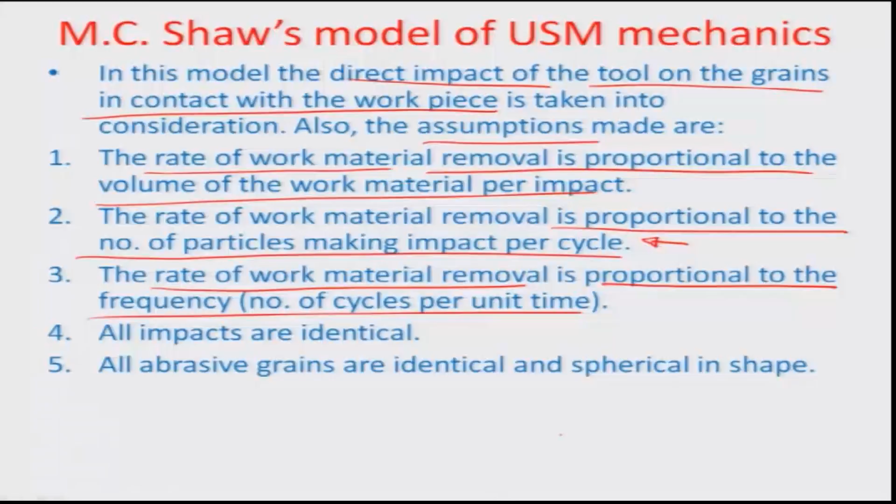The assumptions made are that the rate of work material removal is proportional to the volume of work material removed per impact, proportional to the number of particles making impact per cycle, and proportional to the frequency of the tool head - that is, the number of impacts made by the tool per unit time, or the number of cycles associated with the tool per unit time.

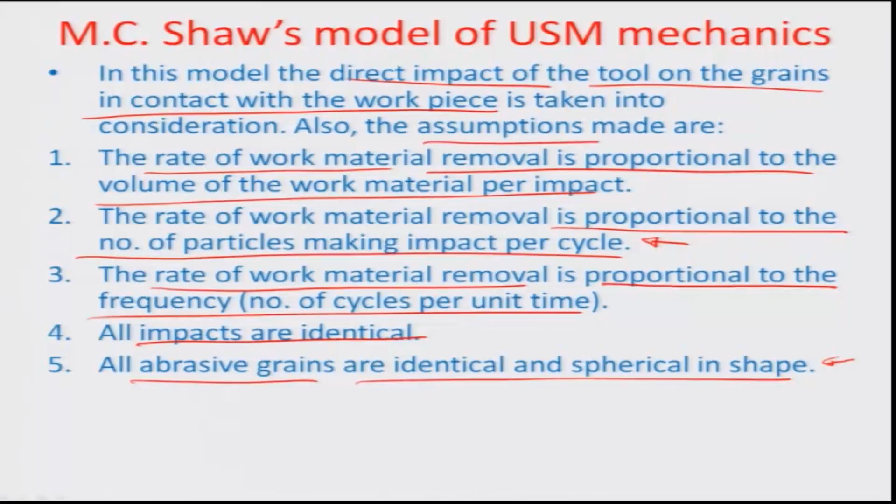We also assume certain other basic things, like the identical nature of all impacts, and the abrasive grains being by and large identified to be spherical in shape, although they are not truly spherical. Abrasives are really sharp edged grains, and the material removal also largely depends on that sharp edge. But for this geometrical assumption, and to derive something more simplistically, we assume all the grains to be spherical and creating brittle fracture just by penetrating perpendicular to the workpiece surface.

So these are some of the assumptions that Shaw makes in order to find out at least the order of magnitude estimation of various parameters related to the USM process.

So typically, if we look at it mathematically, the material removal rate Q is proportional to the volume of work material removed per impact, proportional to the number of particles making impact per cycle, and the cycles per second, or frequency, at which the tool is making impact. So it is V Z nu, which is proportional to the work material removal Q.

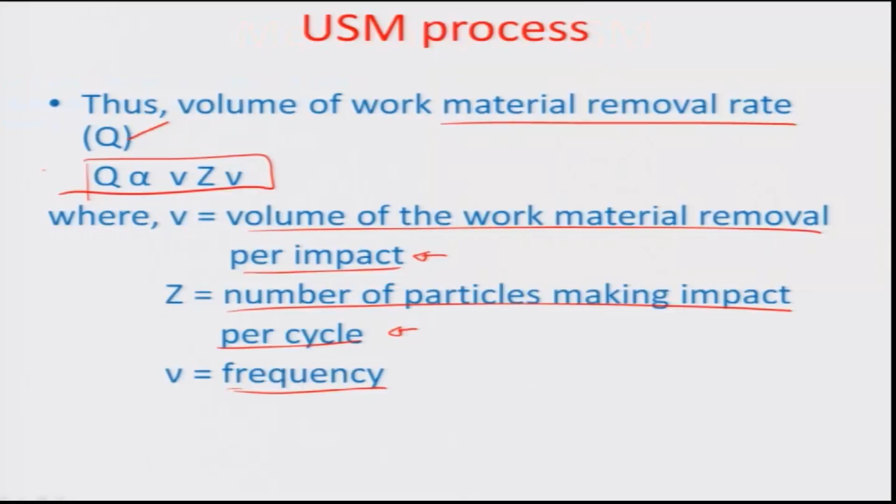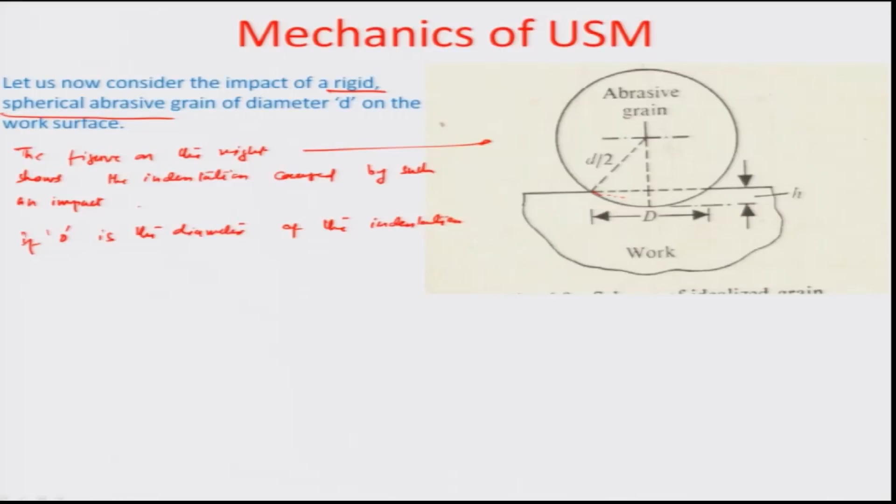If capital D is the diameter of the indentation at any instance, and h is the corresponding depth of penetration, then we get that capital D by 2 is equal to the square root of small d by 2 - that is the mean abrasive grain diameter - minus d by 2 minus h, squared. That is how you can relate this length here to d by 2 minus the length h, which happens because of the depth of penetration. Typically, OAB is a right angle triangle, so the square of this length is equal to the square of this length minus the square of this particular length, d by 2 minus h. That is how you get the value of the indentation diameter D.

In other words, we can get D squared to be equal to 4dh minus 4h squared, and as the depth of penetration h is very small in comparison to the projection of the grain diameter, or even the average grain diameter itself - probably a tenth of the average grain diameter, which is correspondingly about 15 to 50 microns in range - this d is the average diameter of the abrasive grain. Therefore, capital D becomes equal to twice the square root of d times h, and that is how you get the first relationship, which talks about how the indentation diameter can be related to the diameter and the depth of penetration of the grain.

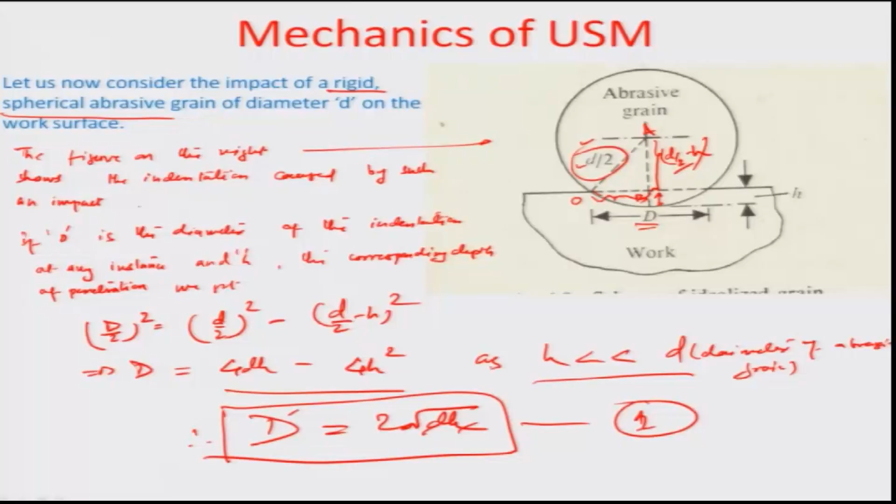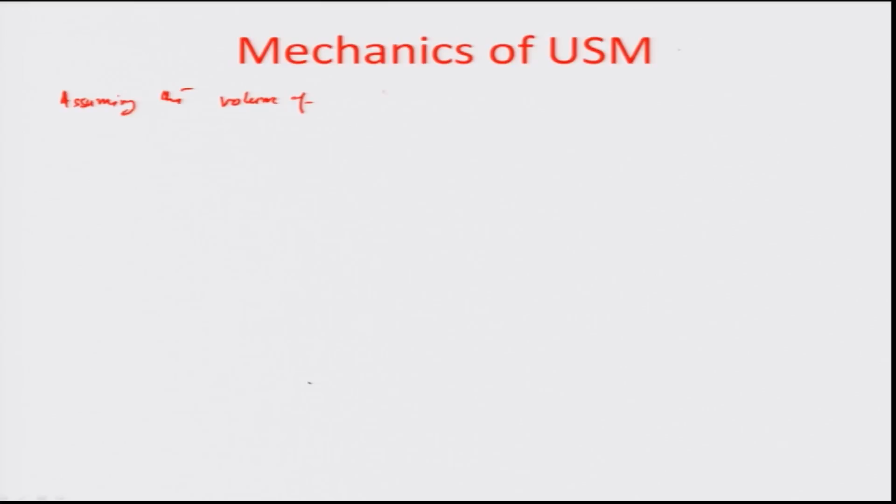Assuming the volume of material dislodged per impact to be proportional to d cube, we very easily get Q from Shaw's theorem to be equal to the volume that is involved, that is dh to the power of 3 by 2 Z nu. Remember, twice dh whole under the root was what the diameter, capital D, was supposed to be. So obviously the two factor is of course a constant of proportionality, so we can take it off, and then we have z times of v, which creates this factor MRR.

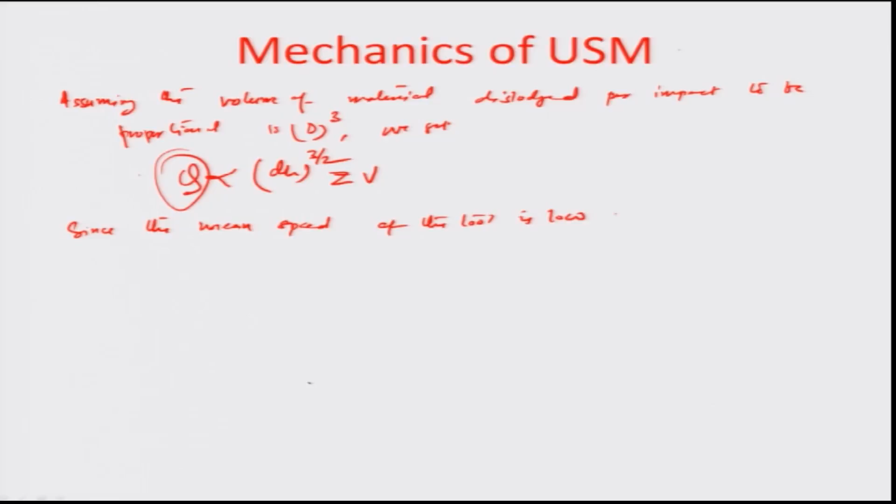Since the mean speed of the tool is low, the mean static feed force F applied to the tool must be equal to the mean force of the tool on the grains.

In any event, the tool is so heavy in comparison to the grains that it is almost a direct momentum transfer of the tool, and the grain mass does not really create any kind of inertial impacts back on the tool. So the D'Alembert's force given by the grain mass onto the tool is much smaller, and it is almost a direct transition of the momentum of the tool onto the workpiece, onto the grains, because of the much heavier mass of the tool in comparison to the grains. So it is almost a direct transfer. You could consider the mean static force F applied to the tool must be equal to the mean force of the tool on the grains directly.

So when the duration of an impact is about, let us say, small delta t, and the maximum value of the impact force Fi is Fi max, the nature of variation of the force F with time can be the following. So let us look at how this variation of F would be.

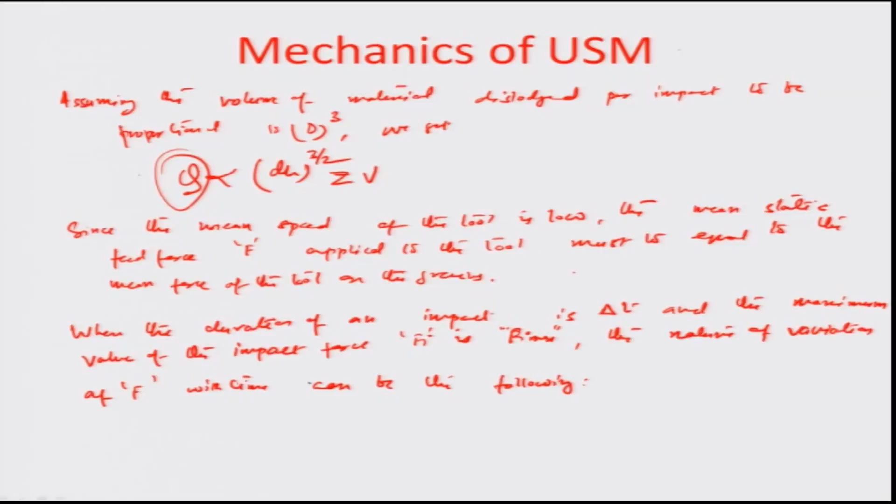Typically the force starts at some point along the cycle of the whole grain impingement process. If you look at the tool, it basically starts from a mean position, starts going towards the workpiece, and until it squeezes the grain between the tool surface and the workpiece surface, the force on the grain can be 0, because the grain is moving exactly in the direction of the tool. With this time period, as part of the total time period of oscillation of the tool, there is a substantial amount of path length where the force felt on the workpiece is almost 0, because the grain has not yet touched.

But when the grain has actually started touching, and now it is giving a reverse reaction, that is really where the force comes into picture. And so obviously, as the tool progresses and the grain kind of impinges onto the workpiece, the force by the grain onto the workpiece keeps on increasing to an extent where it is able to cross over the ultimate yield stress of the material, and beyond that there is a fracture. So the grain and the fractured piece gets dislodged automatically, and the force comes down to 0.

So that is how you basically represent this trend: the force at a certain point in time, when the grain has started pressing, let us say at this particular point A, starts to increase all the way up to a maximum force Fi max, beyond which there is a flow stress which comes into the material, and there is a fracture and a failure. Beyond that the force again comes back to 0, because now you can think of it as if the tool is also receding away, as it is coming to the extreme position and then again returning back to the mean position. At the same time, because of the dislodgement and everything else, there is a cavity now, and the fractured piece as well as the grain has moved off.

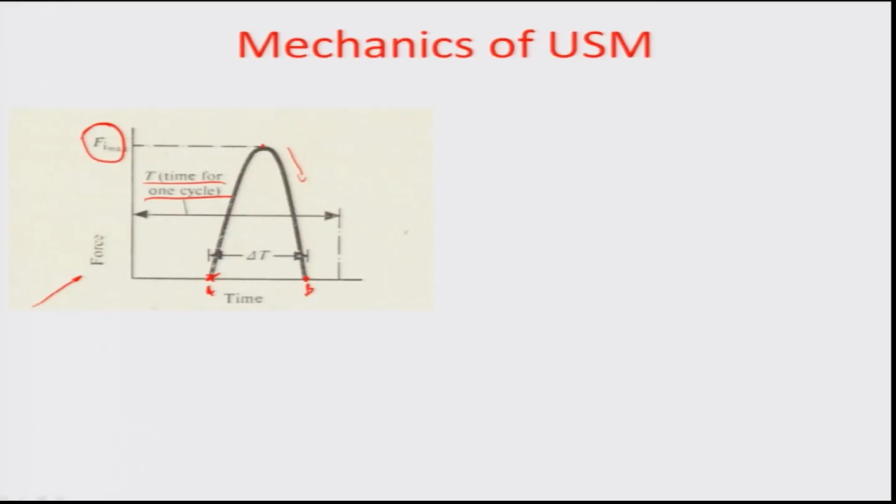So the average force, given by capital F, is actually 1 by t, t being the time period, times the integral 0 to t of F(t) dt. So it is the time integral of force divided by the whole time period t as the average force, where capital T is the time period of each cycle. So you can think of this as the area under the force-time curve averaged out over the whole domain of the time period t which we are considering for this operation.

So the duration of the impact is actually delta t, as can be seen here, and the maximum force is Fi max.

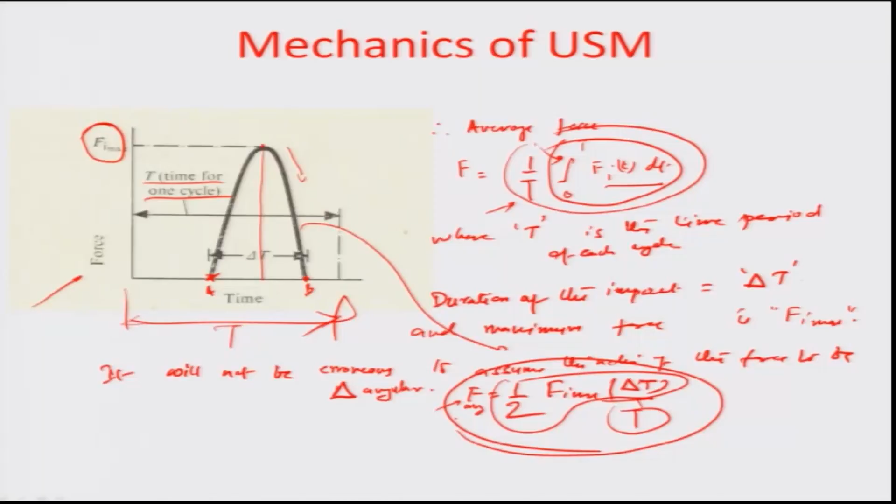So this is only an approximation, however, and it works very well because obviously this peak is very sharp. It goes all the way to an extent where the ultimate yield strength just gets exceeded and then there is a fracture initiated. So there is a sudden reversal of the force. It is quite sharp and quite high quality when we talk about the force-time trend in this particular case.

So now if you look at the way that the tool really positions itself, the tool is about a mean position O, and the position A indicates the instance that the tool face touches the abrasive grain. So the grain is somewhere here lying in touch with the workpiece on one side, and the tool moves between O and A, so that the tool starts pressing the grain.

The period of movement from A to B represents the impact, because now it has to go all the way up to the indented value which is B here. So the surface moves to B, meaning that the grain would actually now move without breaking into the workpiece, and AB is really the distance it would cover, like an indentation of the grain onto the workpiece surface. So the indentations caused by the grain are both on the tool as well as the work surface.

You can think of it that instead of looking at only the workpiece, the grain is much harder than the tool as well. So there is some depth of indentation on the tool side, we call this HT, and some on the workpiece side, HW, and obviously the ratio of hardnesses of the tool surface to the workpiece is very important and quite material whenever we talk about the USM process.

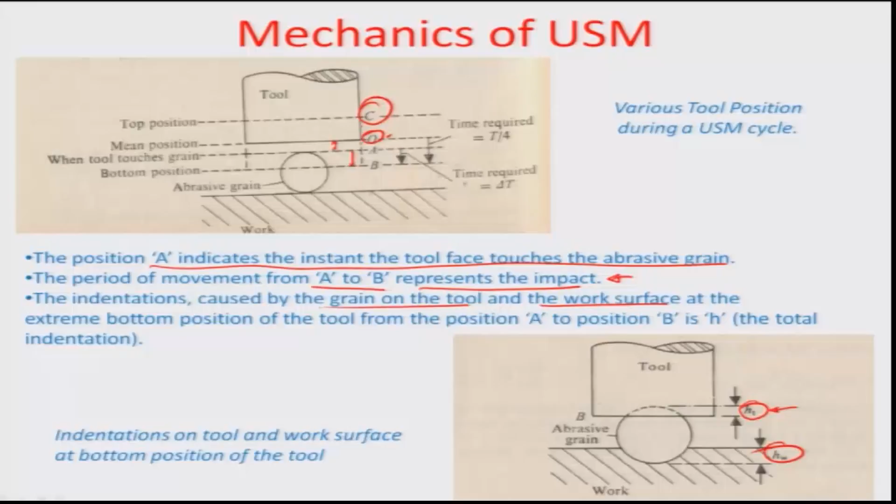So beyond this position B, the tool recedes back, passes again through the mean position O, goes all the way up to another extreme position C, and then comes back to O. So this is how the whole tool oscillates back and forth about the mean position O, particularly at an ultrasonic frequency.

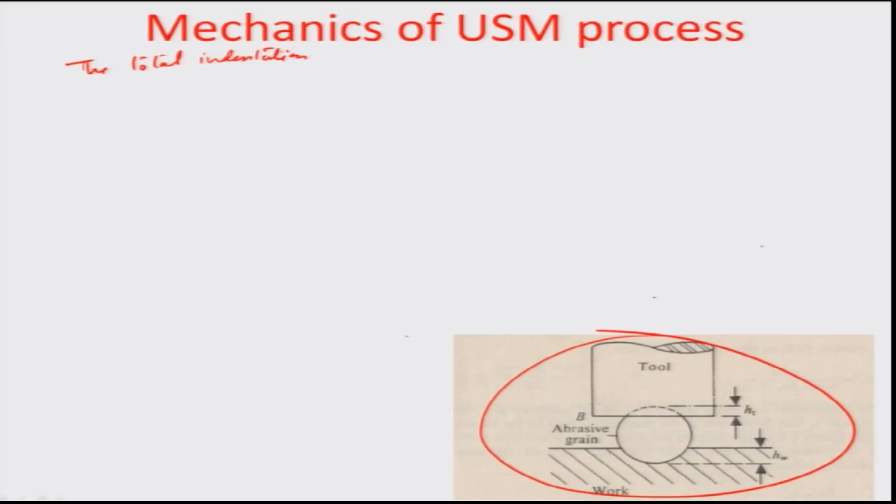So then the total amount of indentation, as can be seen right here in the figure, is actually given by the total indentation on the tool side plus the total indentation on the workpiece side. So I can always write this as HW is the indentation caused in the work, and HT is that caused on the tool side.

Supposing that A was the amplitude of oscillation in this particular case, the total time of oscillation from the mean position O to C, back to O, again O to B, and again back to O, if that is equal to time period t...

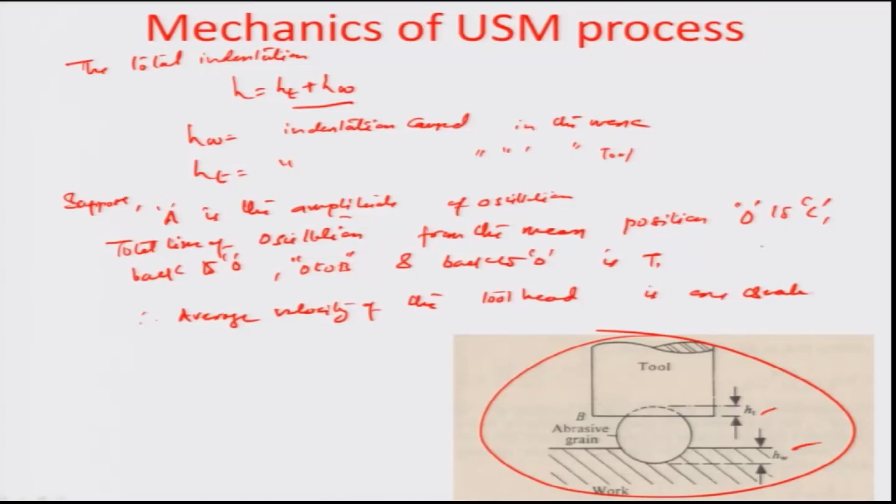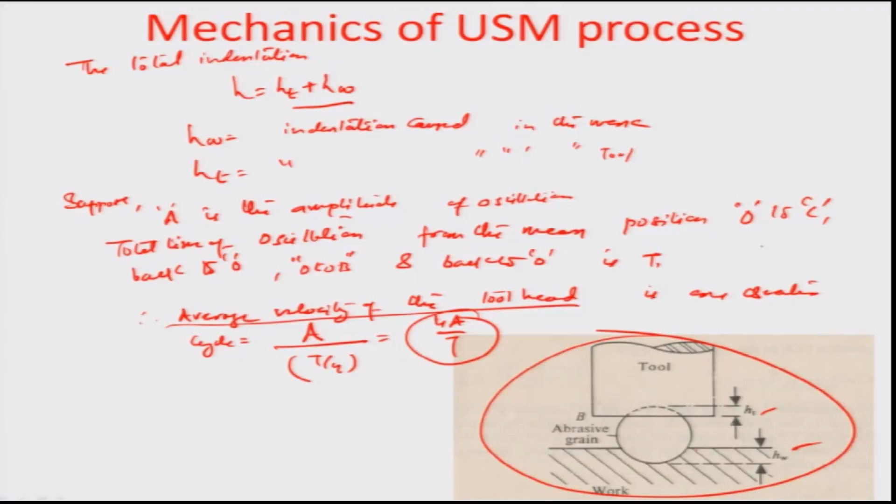...the average velocity of the tool is exactly a quarter cycle having amplitude A divided by t by 4. So you have 4A by t as the average velocity of the tool head, which you get realized because of this fast moving. You have to think of it that the amplitude A is basically from mean to the extreme position, and in the whole time period t you are covering at least 4 such amplitude movements about the mean position.

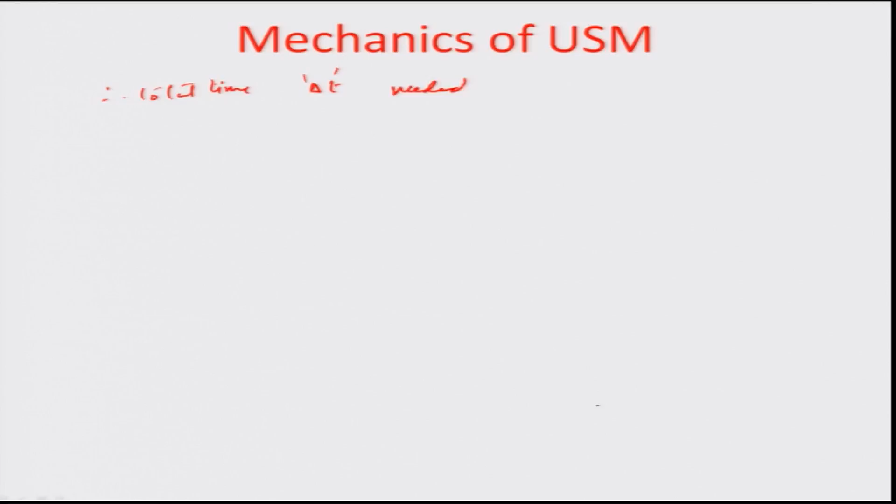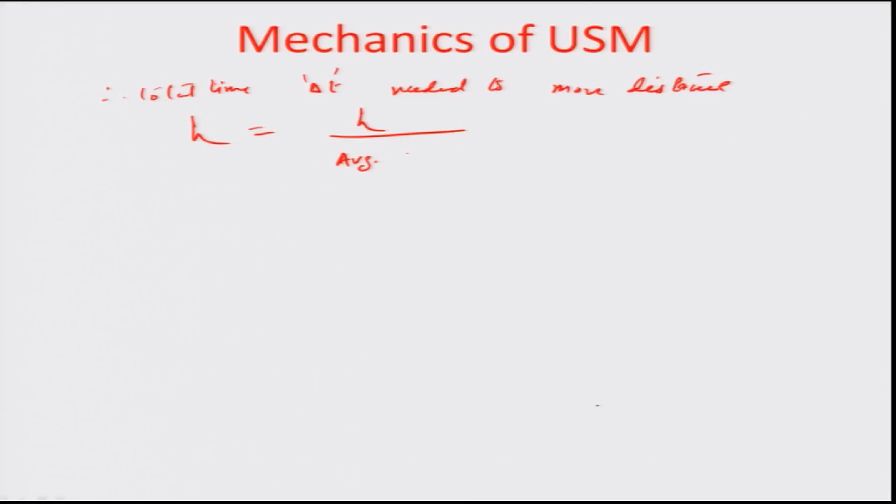So, having said that, now the total time needed to move the total indentation distance, that is h, should be equal to h divided by the average velocity of the tool. In other words, it is actually h divided by 4A by time period t, and h can already be supplemented with the tool workpiece indentations times of t by 4. That is how the average velocity, the total time delta t that is needed to move the distance h is represented. Mind you, this h is composed of the indentation across the tool as well as the workpiece.

So, the average force, as we had calculated earlier, is actually equal to half Fi max times of the time delta t, which I had just calculated. Time delta t is obviously the time in which the grain gets indented. So, I just substitute this value h t plus h w divided by A times of t by 4 times of 1 by t. That is how the average force was represented.

If you look at, the average force here was half times of Fi max times of delta t, which is actually the total time period needed for the force cycle to go to Fi max and back in the graph earlier. So, having said that, now the Fi max therefore can be represented as 8 times the average force times the amplitude divided by h w plus h t.

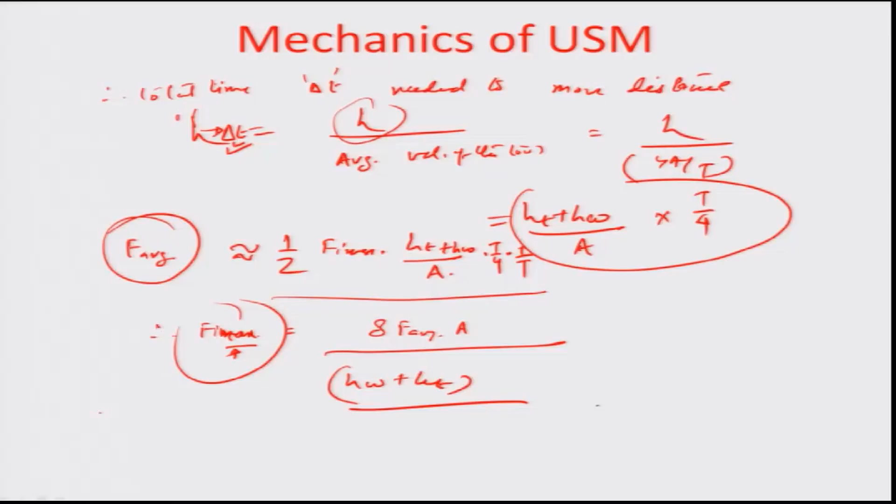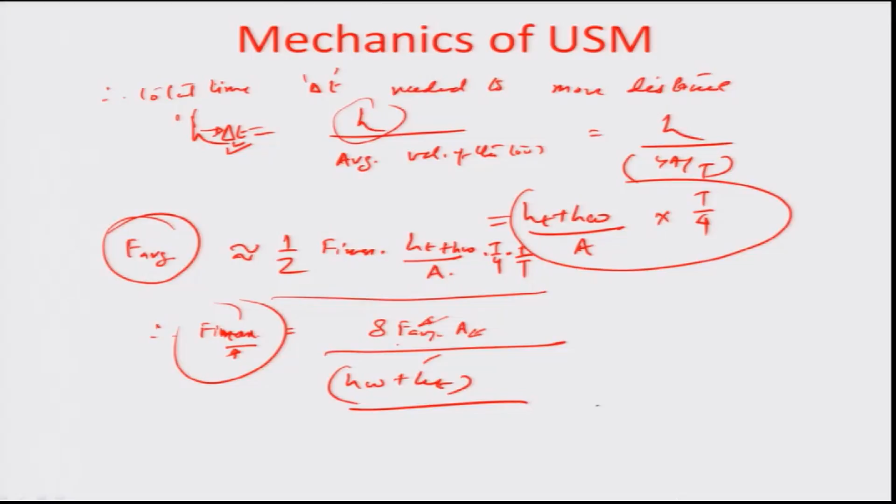The whole goal behind what we are trying to do here is this Fi max can be very easily correlated, if we knew the area of the indentation, to the ultimate yield strength of the material, which is actually a property. So, with that on board, we would like to have a very important estimate of what is going to be the average force, what is going to be the amplitude. Obviously, the depth of indentation can also be studied by looking at the various features on the surface which get formed, and so that is how I would like to bring in something related to the property and something related to the geometry to predict, at least order of magnitude wise, the material removal rate.

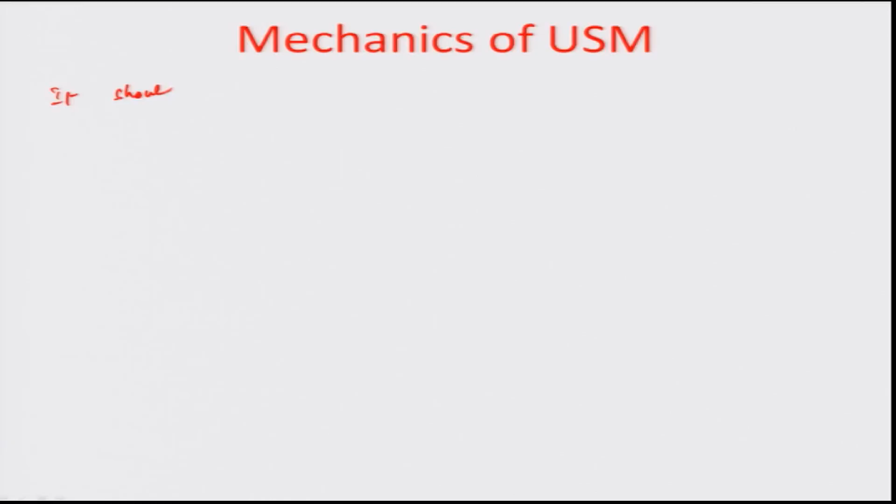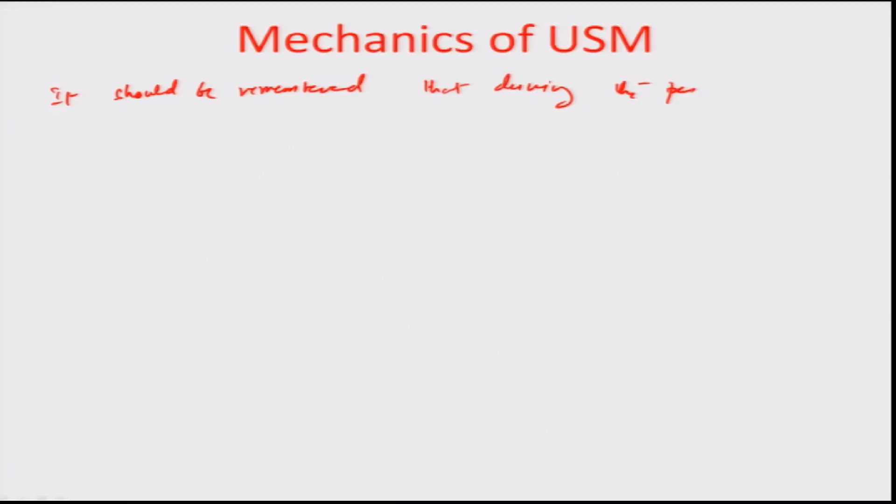So, it should be remembered that during the period delta t, around z grains are in simultaneous contact with the workpiece, and they are all being simultaneously plowed into the workpiece by the tool head, and so the force per unit grain is represented by the Fi max per unit z.

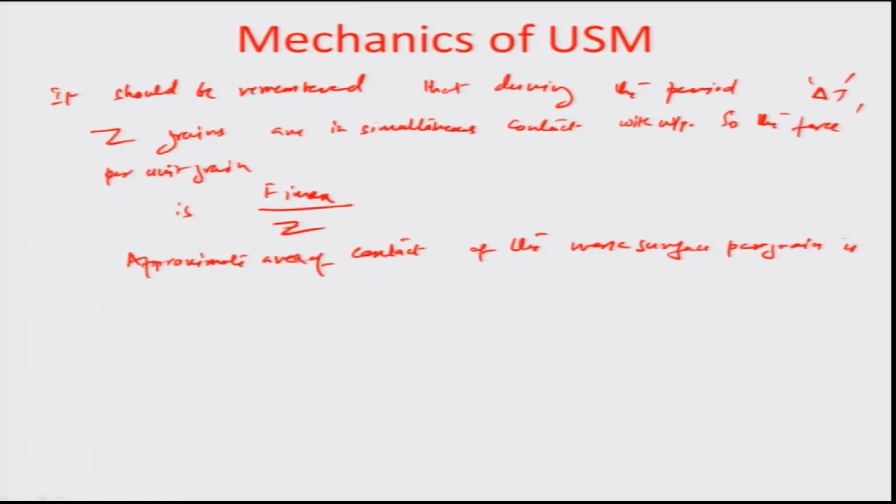The approximate area of contact of the work surface per grain, you can think of a case that the grains are all spherically indented into the material. If I look at the top view, they are all of diameter, indentation diameter d to the workpiece. So, the total area of contact of the work surface per grain that is available will actually be equal to pi d square by 4. And this results in pi d Hw, because d is root of twice d Hw as had been calculated earlier in equation 1.

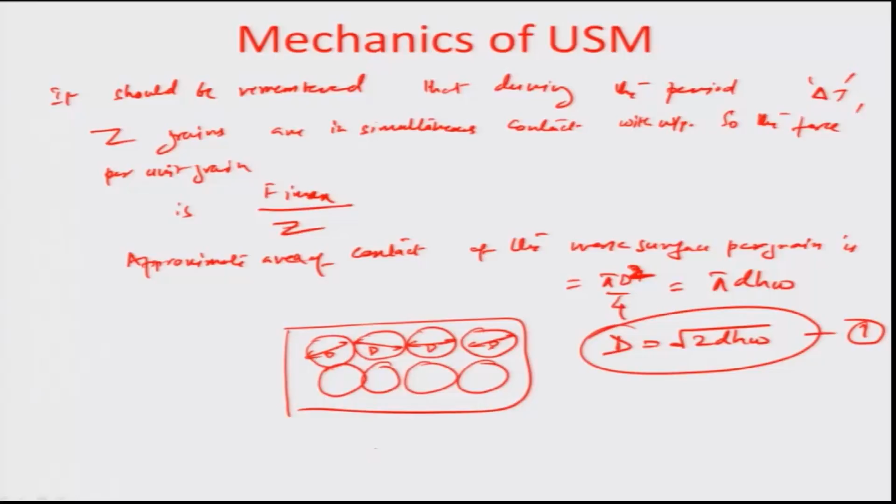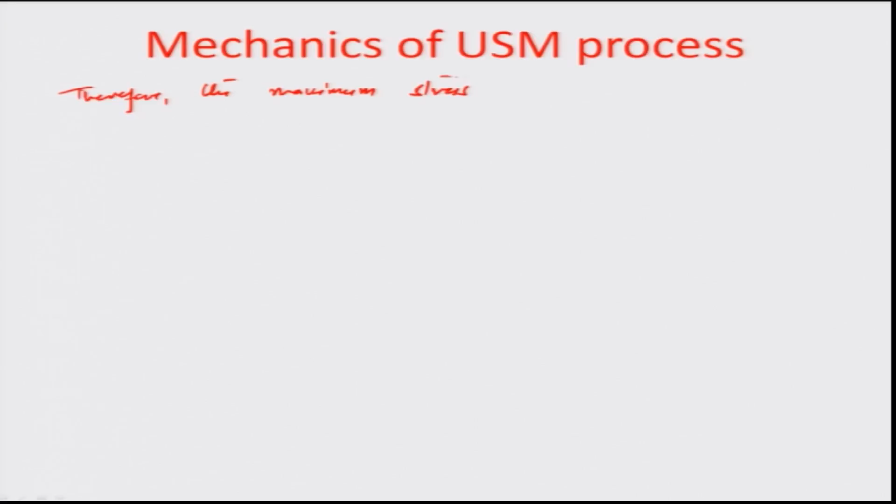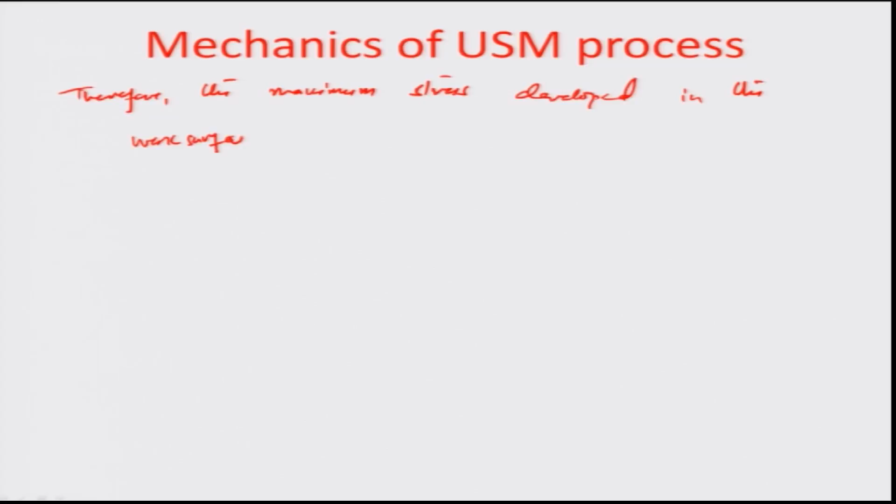So, therefore, the maximum stress developed in the work surface is sigma w equals the force Fi max divided by Z, so that is force per unit grain, divided by the area of contact of the grain, which is pi d HW. In other words, sigma w, or the total stress exerted by the grain at the indentation point, is given by 8 Fa, this is the average force, times the amplitude A divided by pi Z d HW times of HW plus HT.

I am just merely substituting the value of Fi max in terms of the average force as borrowed from the earlier illustration just made a few lines back. So, that is how you can actually record the total amount of stress per unit grain.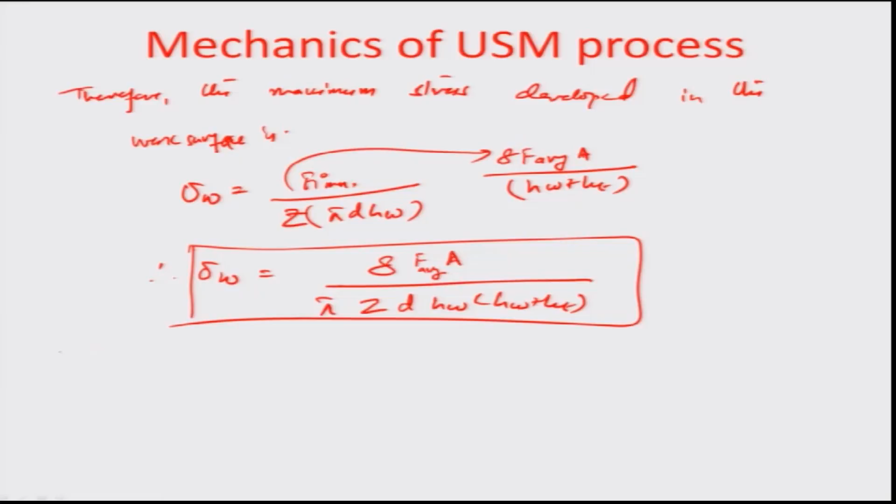And so, it is quite reasonable to assume that the depth of penetration is inversely proportional to the flow stress of the material. And this is so as long as the load and the indenting sphere's diameter remain constant. The load varies or the diameter of the indenting sphere varies, which happens because there is a grain to grain variation in terms of the diameter. Obviously, it changes this approximation that penetration being inversely proportional to the flow stress.

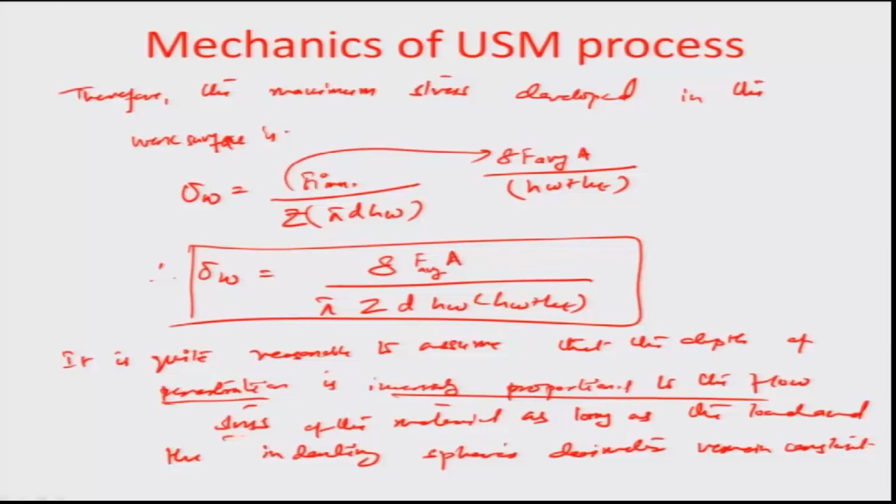So, I am going to now use this probably in the next module to plug the material properties into this equation, so that now we have everything in terms of material properties and some of the geometric parameters which are involved, and so that is how you find the MRR in case of USM. We will do that in the next module. Until then, thank you so much for patiently listening. Thank you.